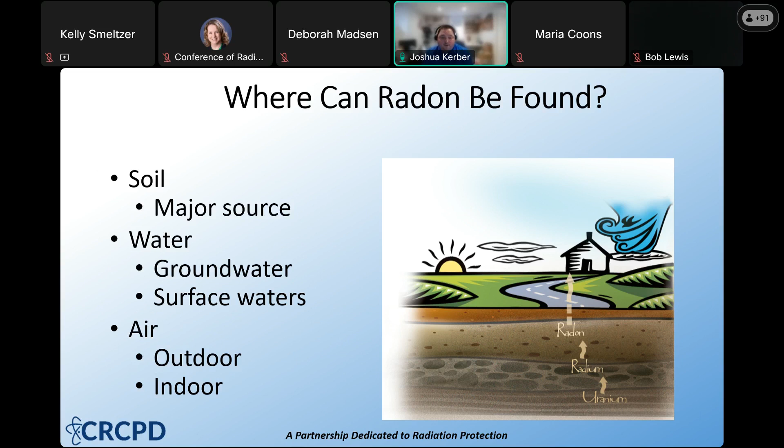Soil is the major source, though we will find radon in water in different amounts in different parts of the country, but our focus today is radon in the indoor environment, indoor air specifically. So of all those sources that are listed there, the indoor air is the problem.

There's no level of radon that's considered safe. We want to get it as low as we reasonably can. About 10 years ago, the World Health Organization put out a publication called the Handbook on Indoor Radon, a public health perspective. I urge anyone who has questions about the health effects and the health and medical based research to take a look at this - it's a really good document that summarizes and captures all of the research that we have up to that date. What they suggest is an international health-based standard, so to speak, of 2.7 picocuries per liter, which is a conversion from becquerels per cubic meter that they use in Europe. In the United States, we measure radon in picocuries per liter. Their suggestion is that we get radon below 2.7 in any of our living environments as well as work environments. In the United States, the US EPA many years ago set our action level at 4. That was a technology-based level at the time in the late 80s. They also recommend reducing your radon in your structures to less than 2 to be safe.

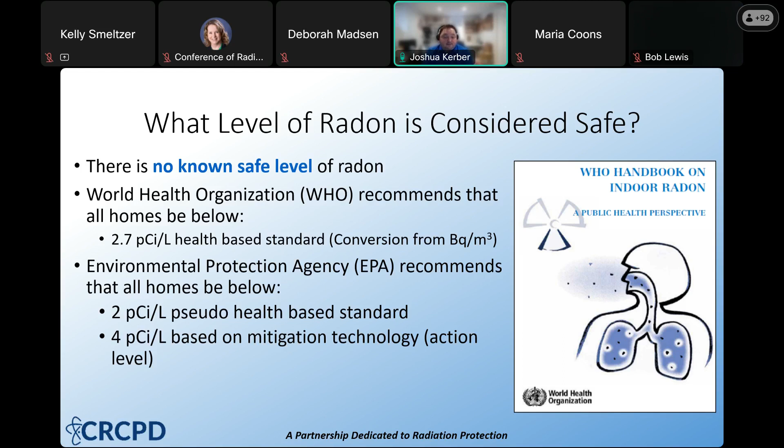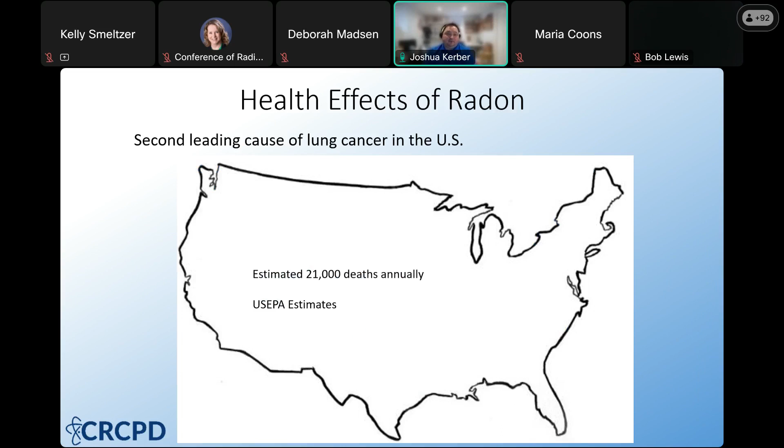As I said, radon is the second leading cause of lung cancer, and the US EPA estimates that 21,000 premature lung cancer deaths happen each year in our country.

This is a table of the risk for people who are exposed to radon. Many people say, well, this won't happen to me. Well, at a level of 4 picocuries in a never smoker, you have a 7 out of 1,000 chance of getting lung cancer. If this was a man-made chemical, it would be highly, highly regulated, but it's not. It's from Mother Nature, and there's a lot of apathy because we can't taste it, smell it, or see it. But it is very, very deadly. And if you look at the far right-hand table, the risk of lung cancer for people who smoke versus people who never smoke is almost 10x as much. It's a synergistic effect, so lung cancer is a very big concern for not only those who smoke, but those who never smoked.

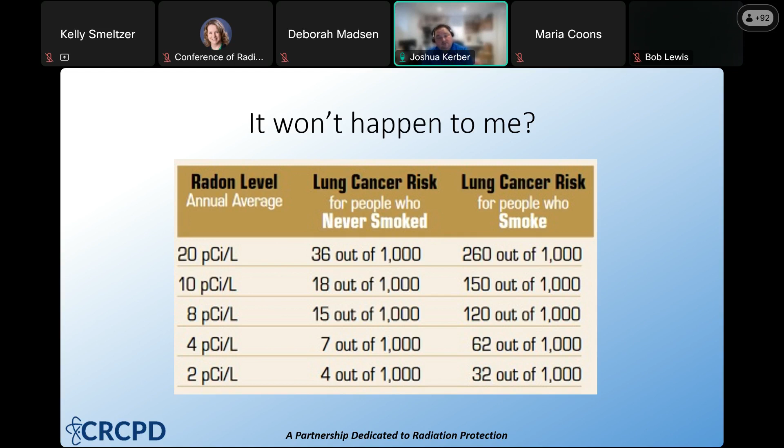In order to have a radon problem in any building, you need three things: a source, which is in the soil; a pathway that leads from that source to the house; and then a driving force. The pathways in most buildings, whether we're talking about a house or bigger buildings, are the same as far as radon entry points.

Where the concrete floor meets the wall, there's usually a crack. You have plumbing penetrations that may not be tightly sealed. We have earth and crawl spaces that may not be sealed, also sump baskets that do not have a lid, and then settling cracks that happen over time, but there are many more that aren't listed here.

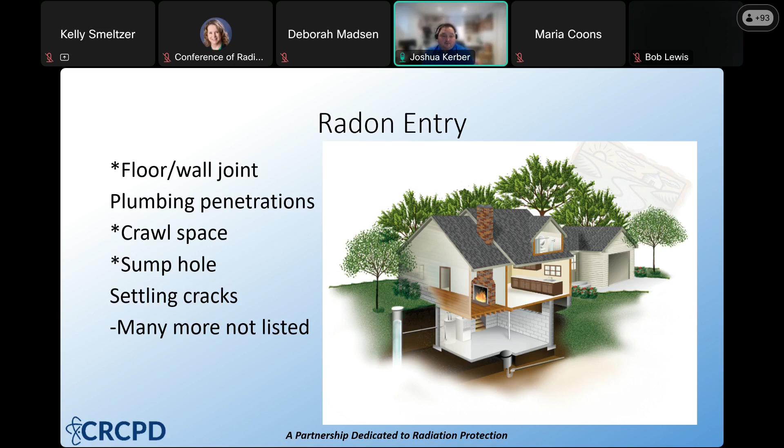A common misnomer is that if I have a basement, I'm going to have more radon. That's actually not true—the foundation type doesn't matter. So if you have a basement, slab on grade, a crawl space, or any combination of the three, you can still have a radon problem.

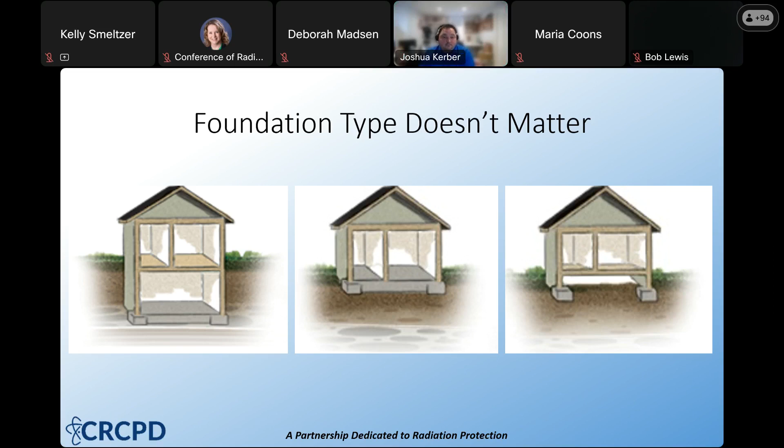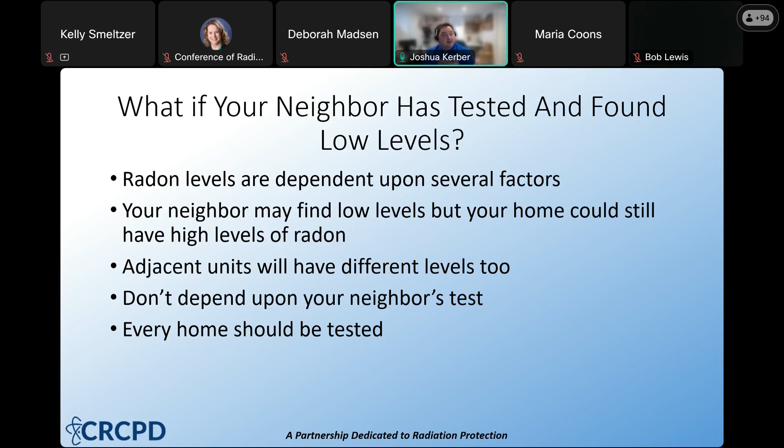So your neighbors have tested, or the unit next door to you has tested low—what does that mean for you? Nothing, really doesn't mean anything. Your radon levels are dependent upon several factors, including how you operate your home or your unit. So adjacent units will have different radon levels too. You're usually not going to see holistically the same level of radon in every unit on every floor of a building. So don't depend on your neighbor's test to decide whether or not you should test your home. Every home should be tested.

We also know that radon is a pressure-driven soil gas. More than 90% of the radon we find in buildings is brought into the building through pressure differences in the air. In most cases, that means soil gas, radon included, is being sucked in.

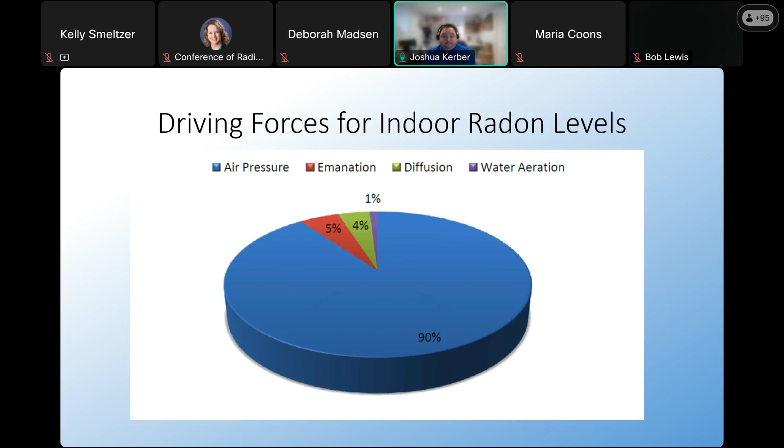Three things will cause air pressure changes in a house, and we'll discuss all three of these: the stack effect, the downwind draft effect or weather-related causes, and then the vacuum effect, which is how we operate homes.

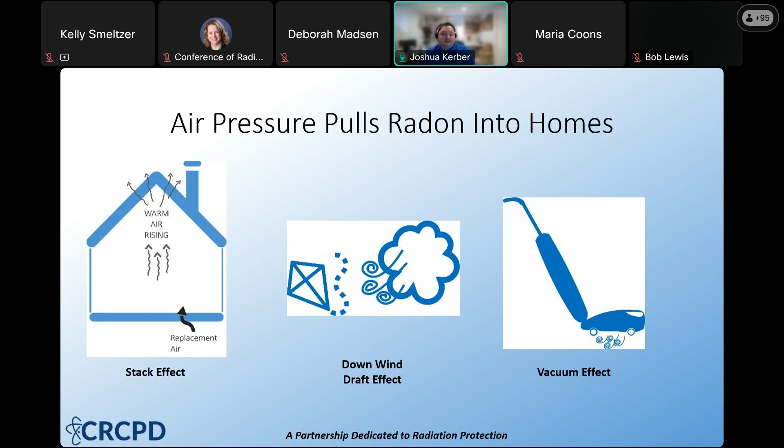This is a picture of some masonry going up in a colder climate. It's only about 20 feet tall, but as you see, the plastic canopy there is protecting the masons from doing their work and giving them a little bit of heat in the colder weather. So inside that plastic shell, the air is being heated so workers can work. If you notice what's happening, the bottom half or so of that plastic shell, the air is going in, and on the top half, the air is coming out—you see it kind of pillowing out. I challenge you to check out any sort of construction enclosure like this next time, and you'll see it happening. And it doesn't happen just in the winter, it happens all year round.

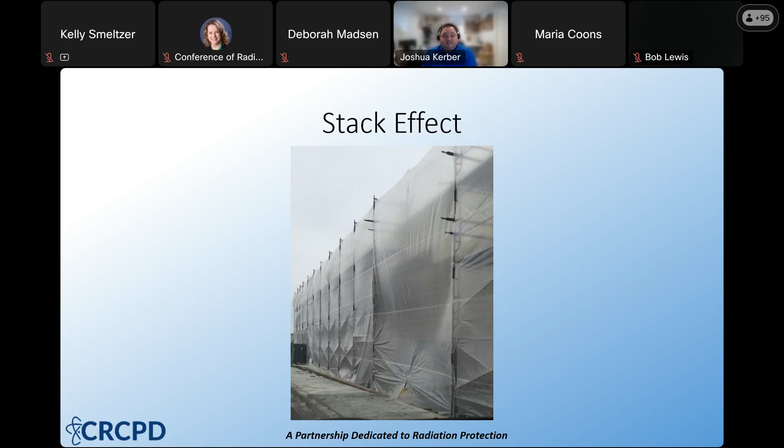So the chimney that we live in, we build a box, set it on the dirt, and start to live, breathe, and sleep in the thing. It's a house or a building. It acts like a chimney, and the house has the ability to suck on the soil. Every house you have sucks, believe it or not. Any unit of air going out the top of the building needs to be made up in the bottom part of the building. In many cases we control where that air is coming from, but not all. So when the lower level of the building is sucking air in from outside as well as from the soil, the radon is in the soil. That's where the radon is coming in.

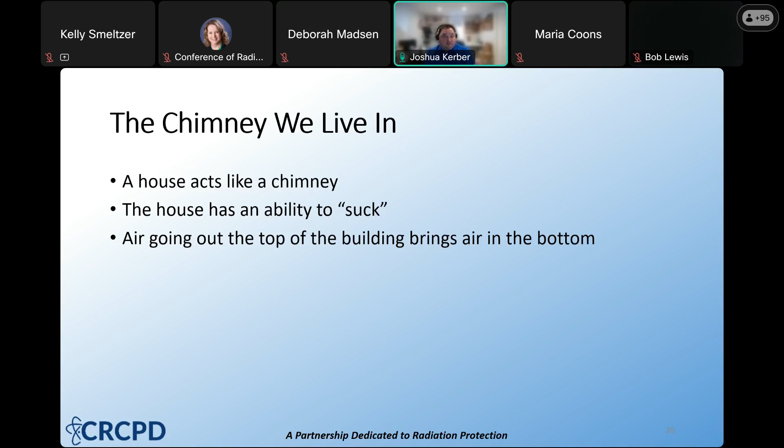To put it another way, we can take a look at the stack effect and the neutral pressure plane of a building. In this case, it's a two-story house. The bottom half of the building is drawing air in because the top half is blowing air out. Warm air rises and finds the high holes in the building and leaves. That creates the need for makeup air low in the building. The taller the building, the stronger the stack effect will be. And if you have holes in the building shell high up, that drives an even bigger stack effect.

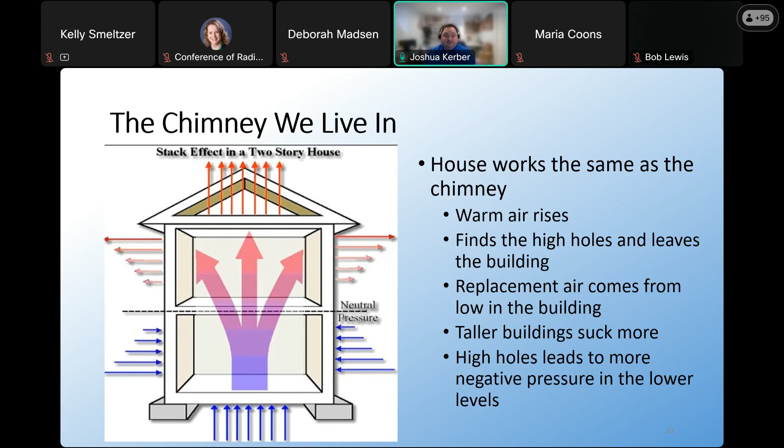All right, weather-related causes. Air is going to flow from areas of high pressure to low pressure.

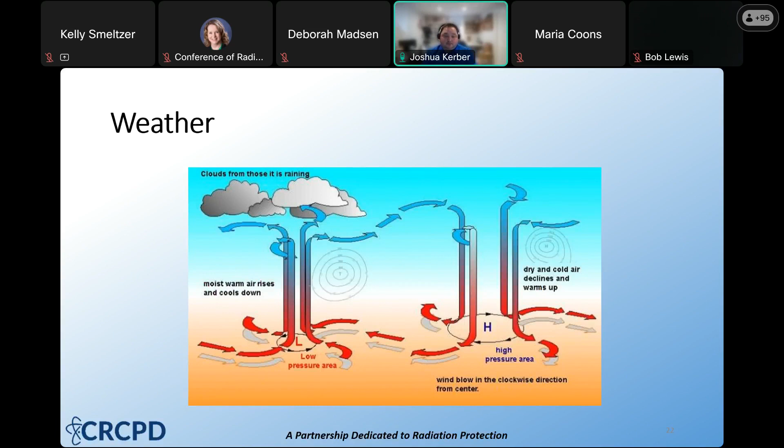So when high atmospheric pressure comes into your area, the atmosphere above you is pushing air down to the ground and into the ground, and it's pushing that air through the building as well. Our buildings are not airtight, even though we like to think they are. So rising barometric pressure will actually potentially lower radon levels in some buildings, but it's temporary.

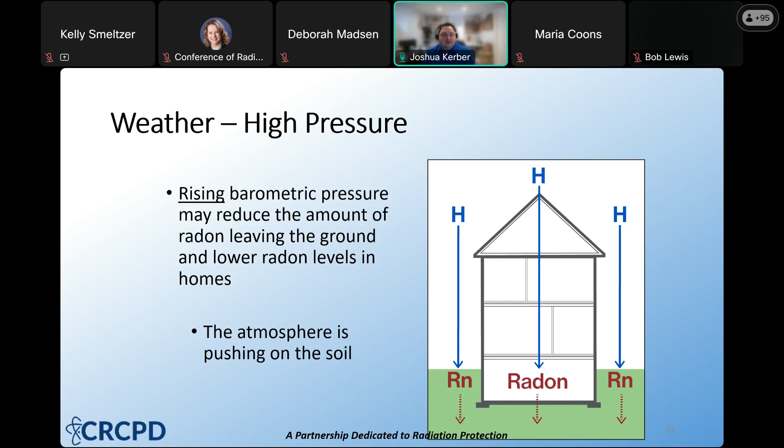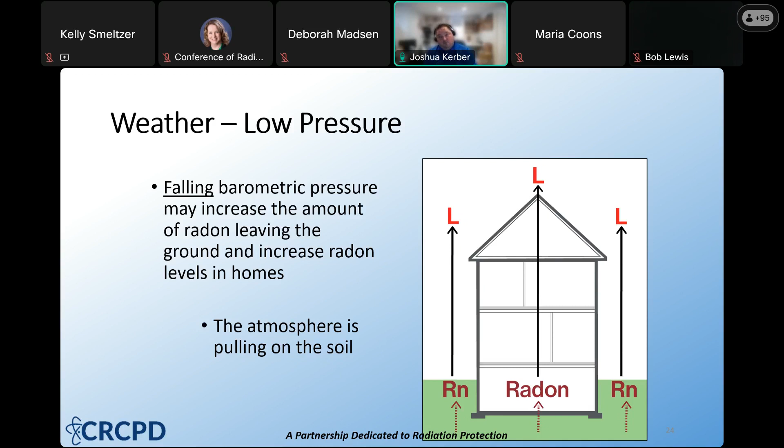On the flip side, when low pressure comes through an area, the atmosphere is actually drawing air up from out of the soil into the natural environment outdoors, but also into your house. So the stronger the atmospheric pressure is dropping, the more radon will actually enter in that short amount of time.

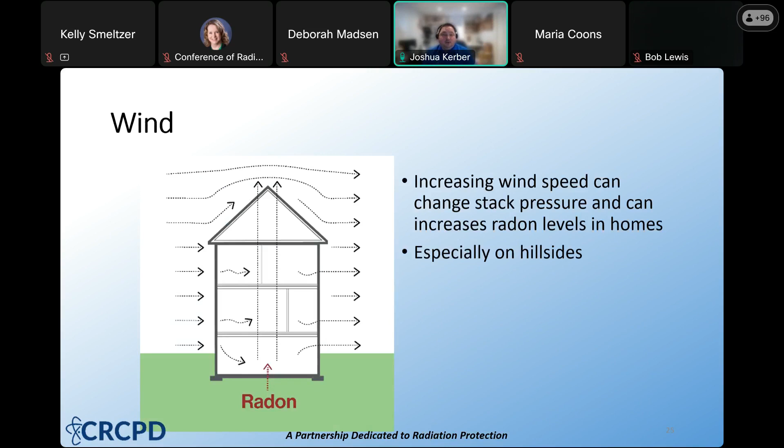Wind blowing against the side of a building or over the top of it changes the pressure dynamics inside the structure, and it's especially apparent on hillsides. So on stronger wind days, depending on which direction the wind is blowing from, we might see different radon levels in buildings.

There's also something we call hydraulic pressure, or when it rains or when snow melts, you get a layer of water on the ground outside. As that layer of water sinks through the soil levels, it caps the dirt outside. So the radon that was going to normally escape to the outdoors is now being pushed down into the soil. And if the path of least resistance is now a crack or gap into a building, that water will actually push that soil gas into the building.

The same thing can be said too if we add pavement, concrete slabs, or sidewalks to adjacent parts of buildings. The radon that used to naturally come out of the ground is now capped and can't escape, so it might start to escape inside the structure.

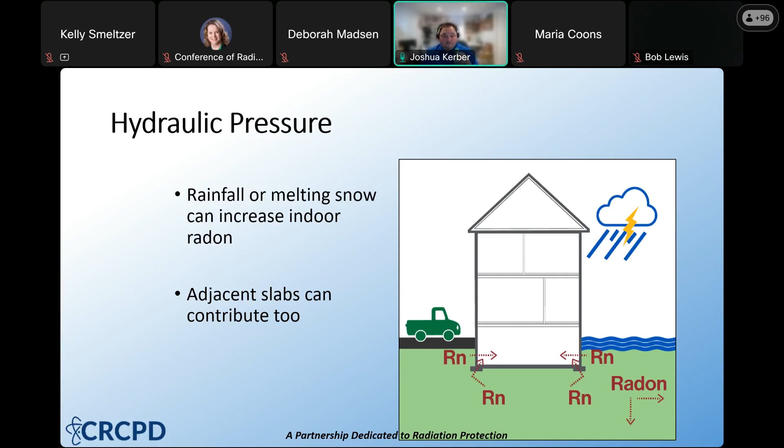Finally, things about building occupancy and what occupants are doing. There are things in buildings we have to make them habitable. Mechanical exhaust ventilation is one of them. We have many appliances that we have to run and exhaust an unknown or known amount of air from the building to the outdoors. Bath fans, when we're bathing - we call them fart fans, so I'll just say it. We need bath fans, and the average bath fan in a typical residential structure runs about 50 CFM. Well, where's the makeup air for that 50 CFM getting exhausted outside? Maybe it's controlled for, but it likely isn't completely controlled for, so now the house is calling for more air.

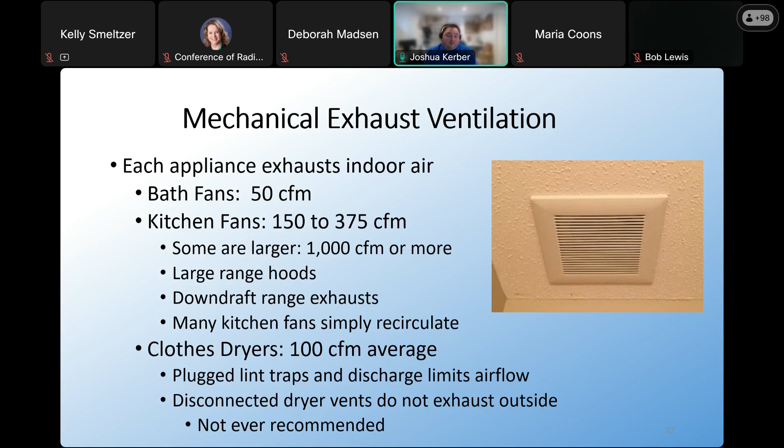The same thing is said for kitchen fans that exhaust outdoors. You have strong air movers in kitchens because we want to capture the heat and humidity coming off the cooktops. There are other exhaust ventilation appliances too, for instance your clothes dryer - if it's properly vented, it's taking indoor air to dry the clothes and expelling that outside. Certain other combustion appliances can also use indoor air for combustion. This is not a holistic list, just wanted to make you aware that common appliances take indoor air and exhaust it outside, and we need to ask where that makeup air is coming from - lower levels of the building, off from the soil.

All right, now we're going to get into radon testing. Just so everyone is aware, there are two types of radon test devices out there. There's short-term tests that go somewhere between usually 2 and 7 days, and then long-term tests, which go for 3 to 12 months. In real estate transactions, we don't use long-term tests, so for the purposes of the rest of this discussion, we're going to talk about just short-term measurements.

This is an example of one short-term test kit. It's a pouch that has charcoal in it. When you're doing a short-term test, regardless of what exact type of short-term test device you're going to use, you need to keep exterior windows and doors closed for the duration of the test. Then after the test duration is complete, you take the kit down, seal it up, send it to the lab, and the lab will send you the results.

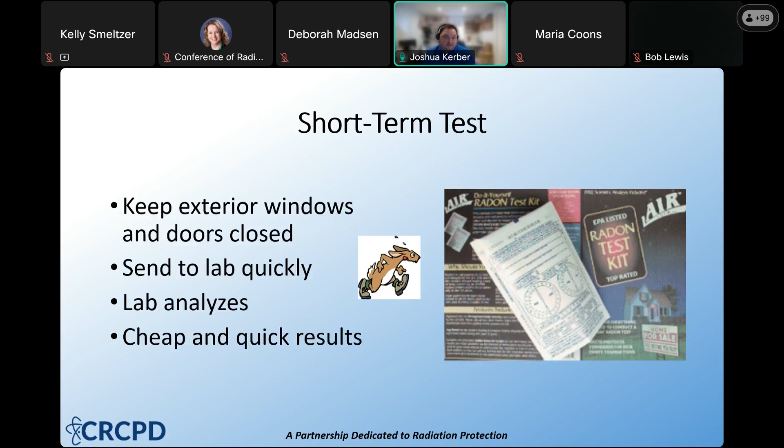This is a very detailed document, and I wanted to go over some of the sections with you just to make you aware that this isn't just something that's willy-nilly put out. A lot of hard work and dedicated professionals have put this together. Section 3 talks about test locations, and there's the ground contact locations, which in these two illustrations are in red, and then the upper floors, which are in blue. Section 3.2 is what might be considered a common multifamily building, a 4-floor or 5-floor multifamily building, where we're testing every ground contact unit, those above a garage because it would be the next unit up. And then in the lobby, you'll see there's 2 test devices because it's a larger footprint room.

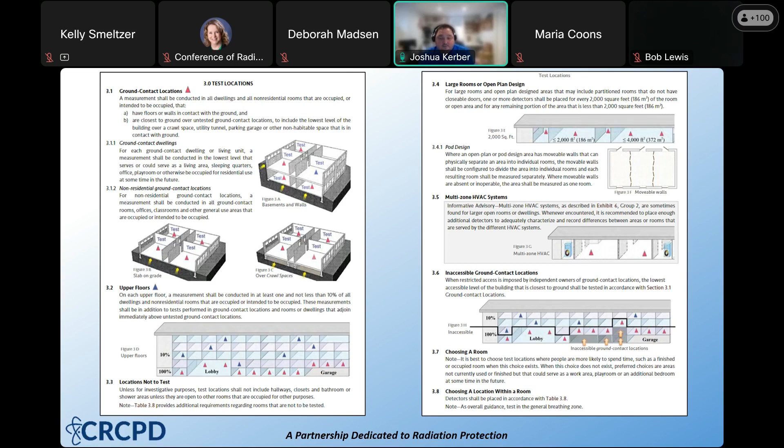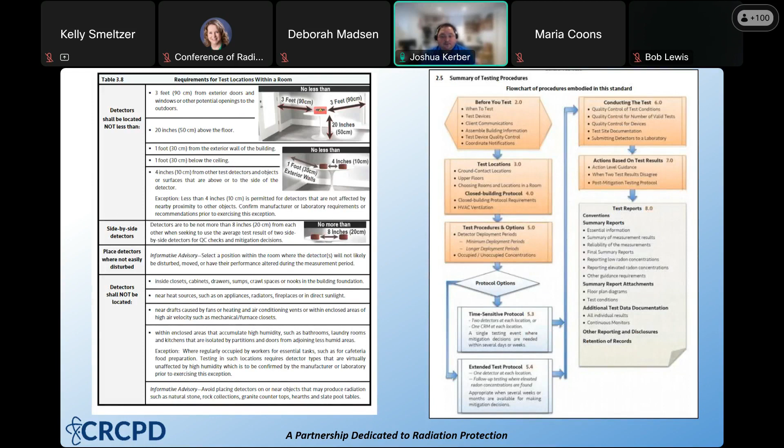So where in the room or where in the unit is a test device likely to be placed? Well, we want it to be in the breathing zone of the room. We want it to be representative of the air that's going to be breathed by humans, so we need to have it about 20 inches off the floor at a minimum. We want to keep it away from doors and windows, at least by 3 feet. Keep it 1 foot away from exterior walls, away from heats, drafts, humid areas.

So we're not going to test a bathroom, laundry room, or kitchen. You want to test ideally a bedroom or say a family room, the room where someone spends most of their time, and then 4 inches away from any other object. If you're going to suspend it or hang these test kits from the ceiling, you want to be at least a foot below the ceiling. I'd like to say 6 to 8 feet above the floor.

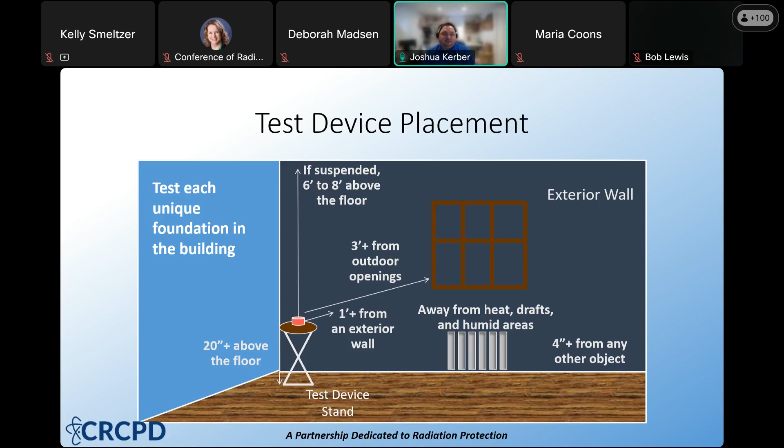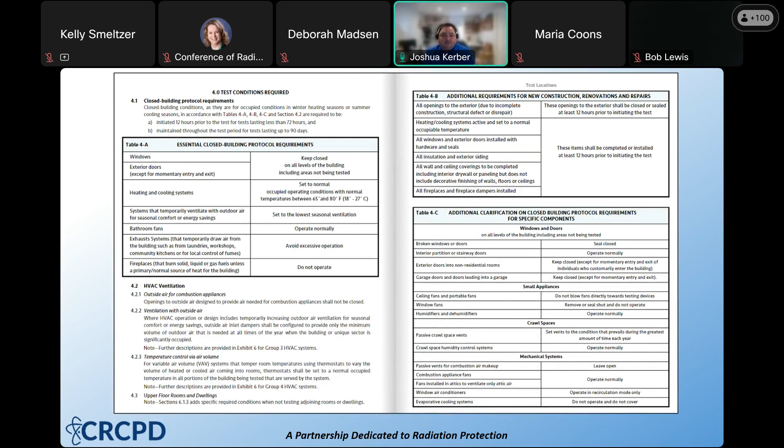Continuing on with the standard, section 4 talks about the test conditions that are required and the HVAC ventilation and how things should be set.

Section 5 talks about the deployment periods. We're talking short-term test devices, so we're talking usually 2 or 3 days, maybe 4 days in real estate transactions, but it's not the only duration that you're allowed to do. Section 5 goes through that.

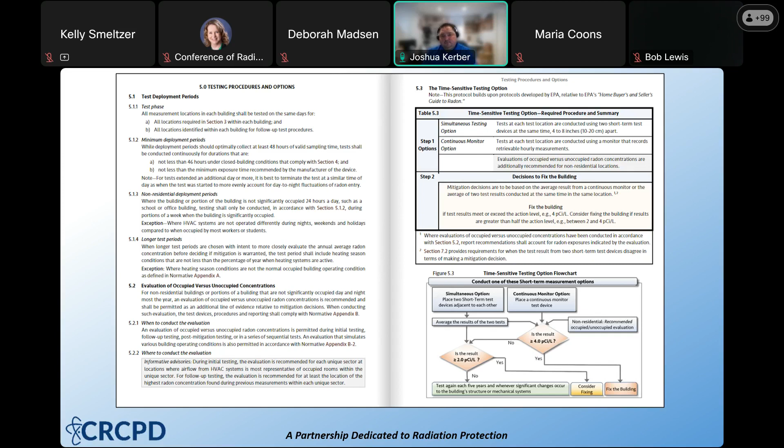Section 6 talks about the things that happen during the test, maintaining closed building conditions and doing visual inspections of the property as well.

Section 8 talks about test reports and what you all should be seeing in the radon test reports that are coming from radon professionals, as far as summary reports and the essential information, and then the summary results and next steps.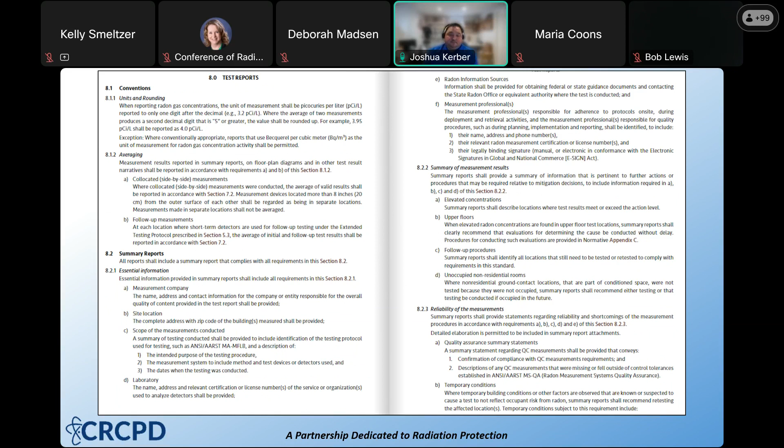The section continues. If there's low radon concentrations, there's one type of radon test report. And if you go to the next slide, it'll show what we wanted to hear or see about the reporting value of elevated radon concentrations. I just want to show that there's a lot here in this section of 8 that is required to be on these professional radon test reports, including some of the attachments as well.

And again, this is the last part of section 8, which talks about what happens with the continuous monitors if you go there, and other reporting and disclosure requirements.

Next we're going to move on to talk about mitigation. There's also additional information available in the companion guidance at the end of this document. It has sample forms and descriptions, including building diagrams, and guidance for building managers.

Let's talk about mitigation then. You did the testing, you found out there's a problem. How do we fix it?

This is a very simple schematic from the US EPA about having a multi-suction point system in a 2-story house. The mitigation process and principles are the same regardless of the size of the building.

We want to suck the gas out, but you want to stop it from getting into the building in the first place - that's the most successful form of mitigation. So we want to redirect the source. We do that by a series of pipes attached to a radon fan that runs continuously, drawing negative pressure from around and below the floor and blowing it outside.

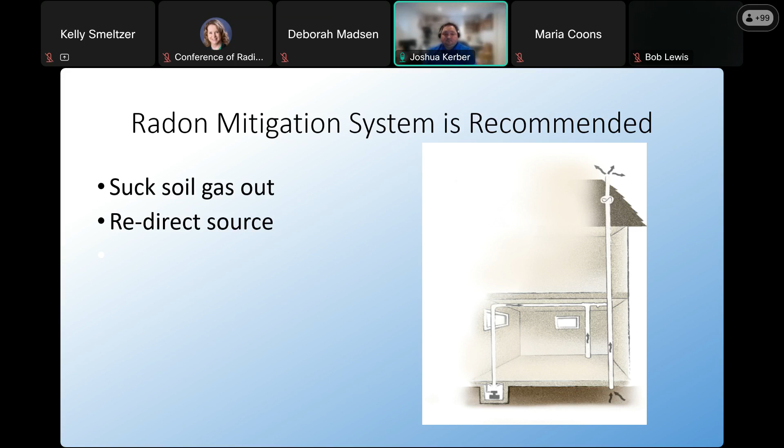I do want to stress that mitigation is a professional level activity, especially in large buildings. There's additional training requirements and know-how on how to do this right, with detailed system design specifications that these trained professionals need to know.

They need to know how to do diagnostics and investigations - how much airflow is it going to take, how much pressure do we need to deliver in order to get adequate suction underneath the entire floor.

In single family homes, a lot of companies will just install a cookie cutter radon system, and that will work a lot of the time. That will not work in big buildings - you really need a lot of applied building science.

And active soil depressurization, or ASD, as it's more commonly called, is the most common solution for reducing radon in buildings.

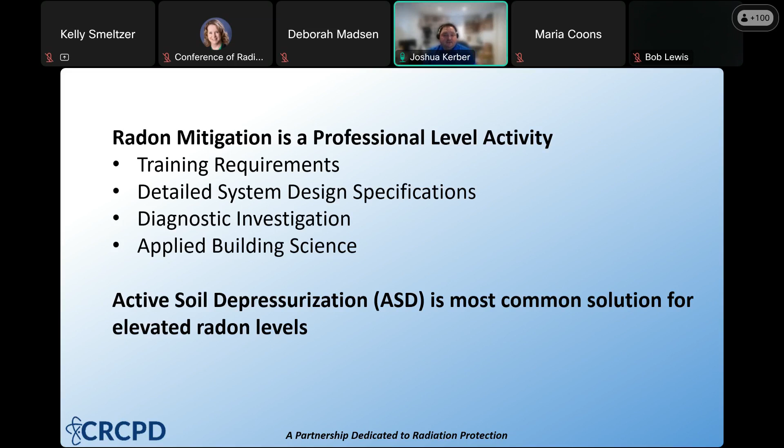And we have a standard for this as well. In this case, the mitigation standard starts with standards for existing homes, and it covers most everything that you'll need for the standards and how to do things.

However, when you bring in multifamily and school and commercial buildings, the larger buildings, it's an add-on standard to the soil gas mitigation. So you're going to need both of these standards to look at, because the one for large buildings refers back to the one for single family homes.

So a common question is, why can't we just seal the cracks? Well, sealing is not a standalone technique. We can try as much as we want to seal all the cracks, but there's 2 types of concrete out there - there's concrete that has cracked, and there's concrete that will crack.

So there's the cracks that will form. There's too many to find sometimes, and they're not always accessible. That's why sealing is not a standalone technique.

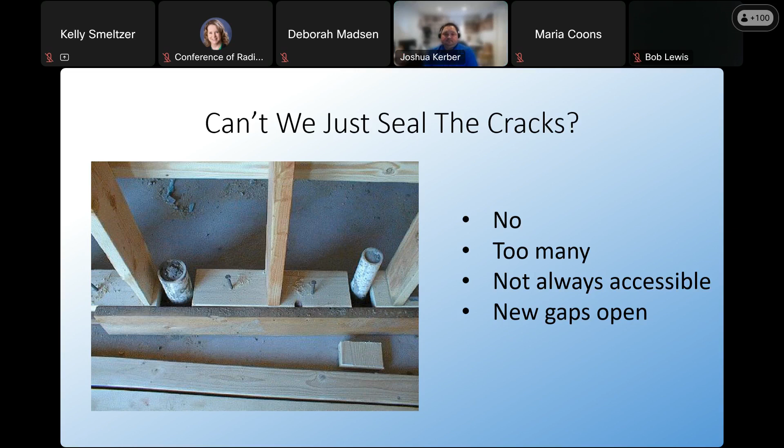So it starts with a hole in the floor. We drill a hole through the floor - sometimes we core a hole, sometimes we chop one out. But then once we're under the floor itself, we'll dig out 5, 10, 15, 20 gallons of fill to create a suction pit. Later, this pit will be sealed from the top and made airtight.

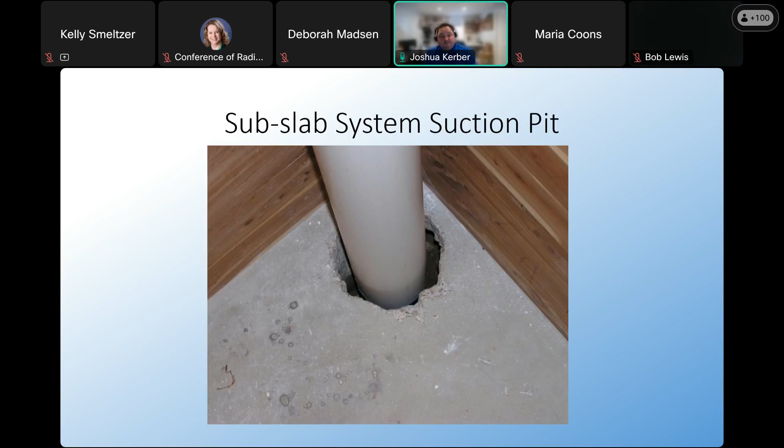We can also use sump baskets to draw air from underneath the soil. Oftentimes these are connected to drain tile, which is shown in the next slide.

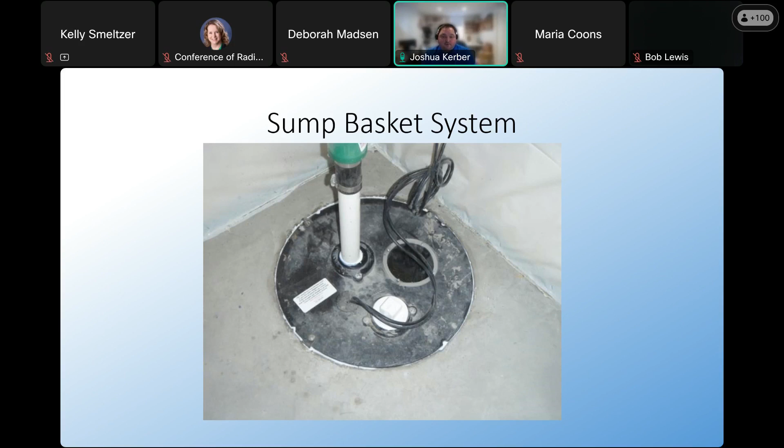These perforated lines run around the foundation of many buildings and dump back then into one place, which is the sump basket. And they're normally not chock full of water.

So if they're not full of water, they're full of soil gas. And if we can capture that soil gas while it's collected there, we're very successful at mitigating the structure.

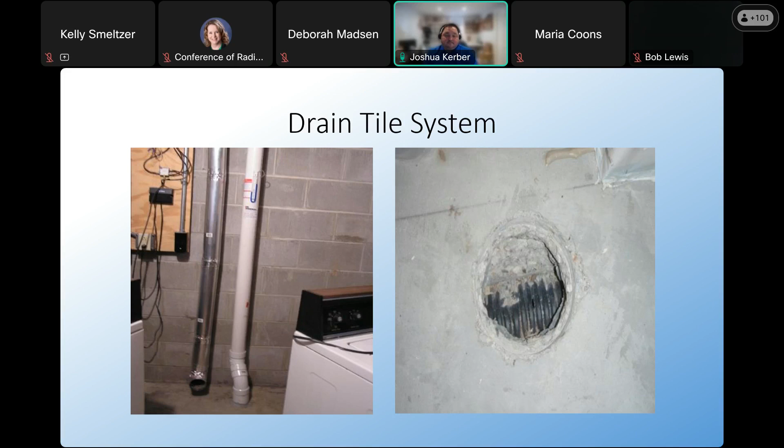Crawl spaces do need to be sealed. Sometimes we also add a suction point under the crawl space membrane to capture the soil gas that's underneath there.

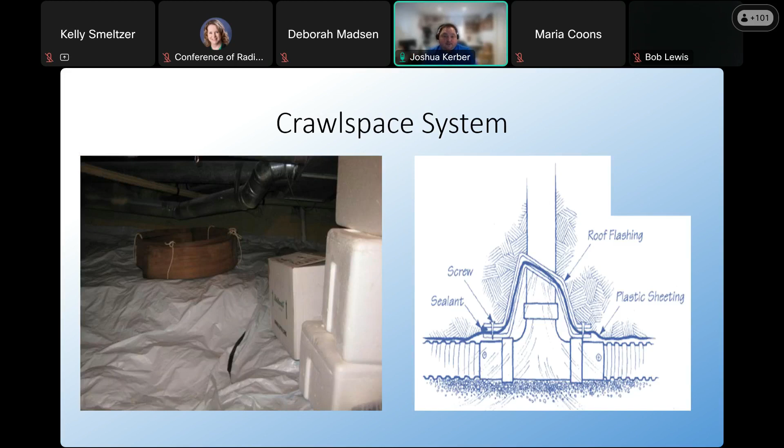Sealing is very important. It's not important to seal to try to keep radon out. We want to seal the gaps and cracks that we have so we can keep the conditioned air in the building.

When you have lots of gaps and cracks and openings that are unsealed, it can short circuit the radon system, costing you lots of money to operate this thing long term. When we seal these gaps and cracks, it makes the radon system more efficient and far more effective.

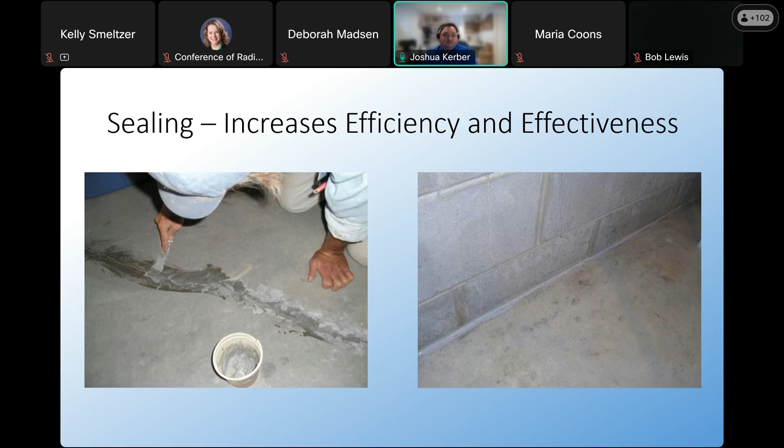In the United States, we put our radon fans outside conditioned spaces. The fan housings can leak. It's rare, but it can happen. And the amount of radon in the soil gas is a lot higher, hundreds of times higher than what makes it into the building. And we're not continuously testing for radon.

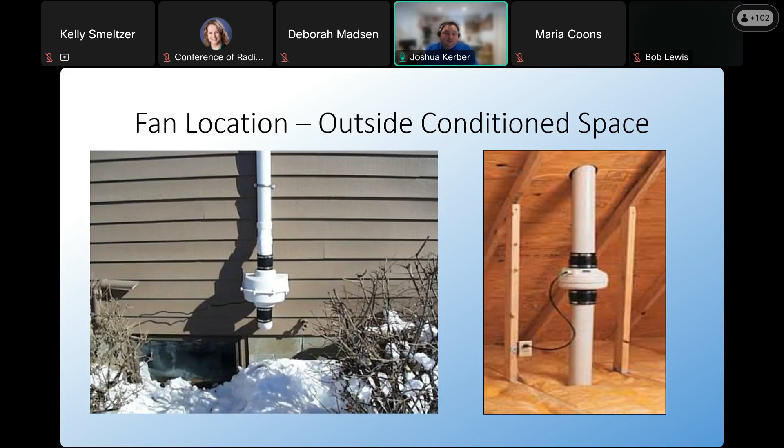So that's why we want to keep the fan outside. And then the next slide is a cross section. I'm getting ahead of myself. Then we exhaust it up through the roof. Once we get back to the standards, we'll discuss the other stuff. So it looks like a normal plumbing vent stack once it's above the roof line.

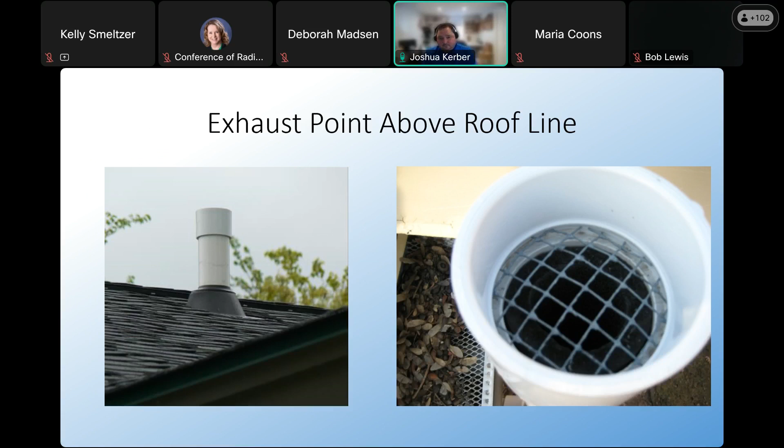Here's the cross section I was referring to. The pipe route can be either in the interior, shown on the left, or the exterior, shown on the right. But what's important here is that any pipe in the conditioned space of the house needs to be below the fan. What that does is put it under negative pressure, so the air is going into the pipe and not blowing out of it. So if there's a loose fitting or the pipe gets punctured somehow, you're not dumping humidity and high concentrations of radon into the structure. You're actually drawing it out.

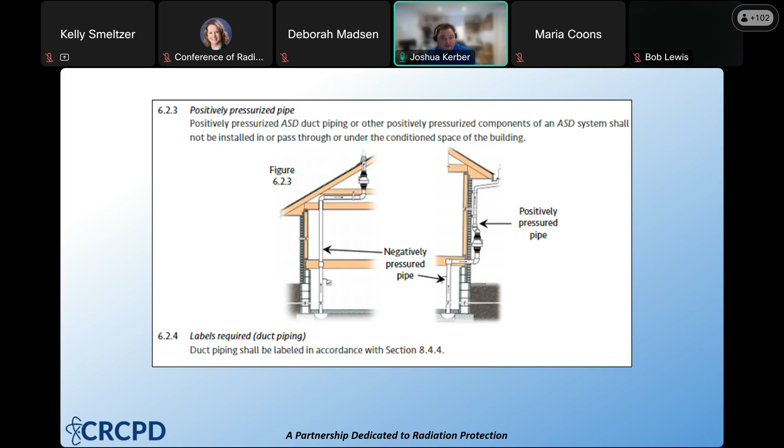There are exhaust requirements, and sometimes these can get pretty complex depending on the situation. Here's just a handful of examples. The exhaust point needs to be 10 feet above grade. It needs to be 4 feet above windows, or 10 feet away from windows if it's not more than 4 feet above it. If you're going to put a horizontal discharge on this, like a 90-degree elbow, then you need to be 20 feet above grade.

We want to be venting these things straight up, as shown in 6.4.9. We don't want any elbows on the end of these. But if you need to get around an obstruction, that's allowed. We just do not want to allow it to blow back down onto the building anywhere.

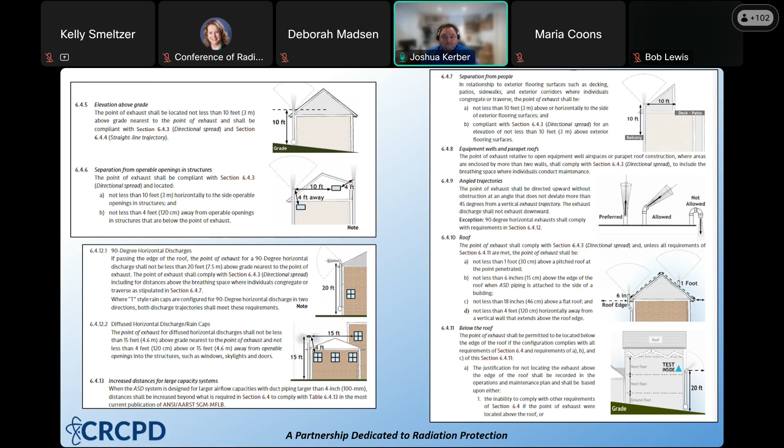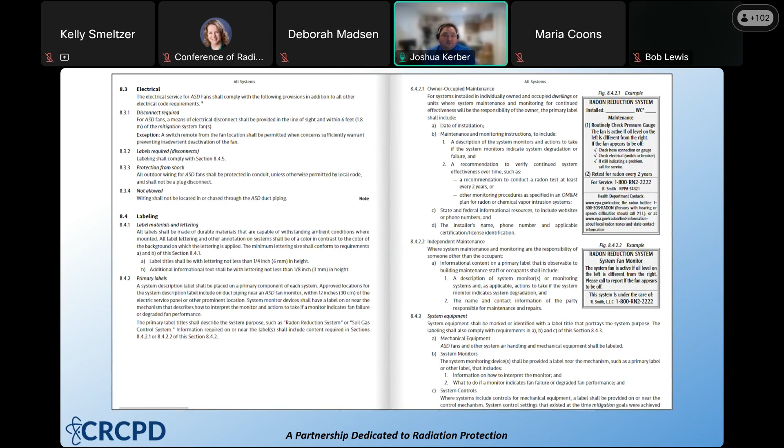There are electrical requirements that come with these systems. The systems need to be labeled, and here are some examples on the right-hand side of the information required to be posted on the system itself.

The post-mitigation requirements include a post-mitigation test that needs to be conducted, and Section 9 of the Soil Gas Mitigation Standards discusses what those requirements are.

And maybe the most important piece for post-mitigation is Section 10, the OM&M, or long-term operations, maintenance and monitoring plan, which is required to be not only created for the system but also handed over once the system is complete.

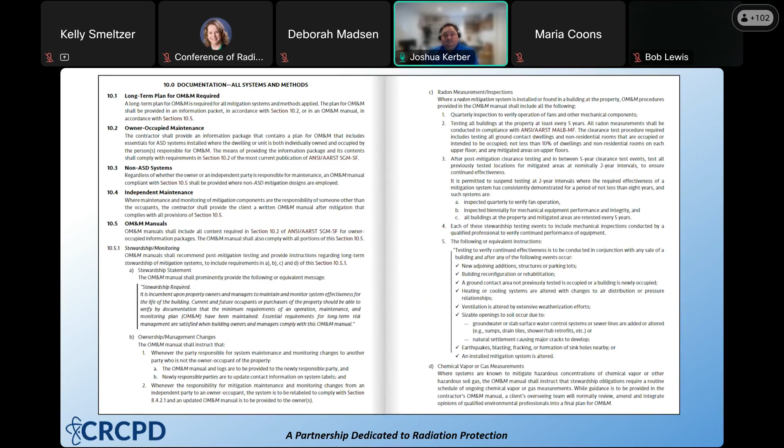There's additional information in these two documents as well, with additional exhibits and companion guidance, example forms, guidance for property owners, and example logs and checklists, found in the companion guidance at the end of the soil gas mitigation standards.

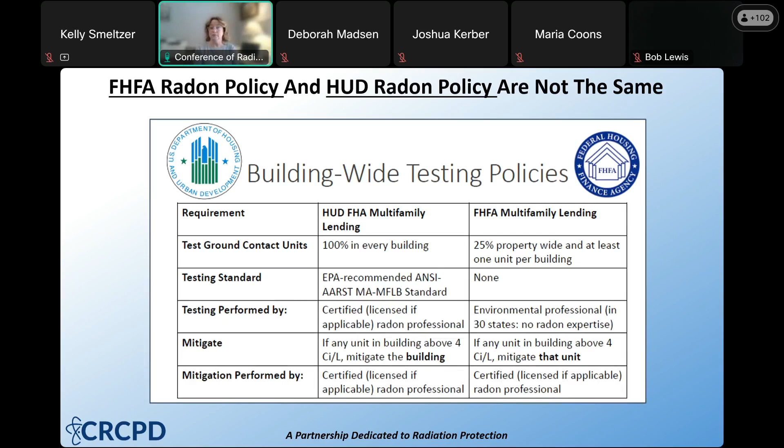There is another important point for consideration I want to provide. A state may not have a specific radon requirement or laws enacted, but a certified radon professional who is certified by a national proficiency program agrees as part of becoming certified to follow the ANSI-AARST consensus-based radon standards. This may lead to a potential conflict of interest for radon professionals if they are asked to not follow the ANSI-AARST multifamily measurement standards—for example, not testing 100% of the ground contact units during a multifamily building radon measurement process. Though the FHFA radon policy stipulates at least 25% of the ground floor units, the radon professional is bound by his or her certification to follow the standards, which require 100% of the ground floor units. This is an important point about which all lenders and environmental professionals should be aware and understand, to try to avoid placing the radon professional in a conflicted position which threatens his or her certification.

In a state which does not have radon measurement or mitigation requirements or laws, we anticipate that the lender will follow the FHFA radon policy. Please do remember that potential conflict of interest with our radon professionals that I just mentioned. Even in non-regulated states, it is recommended that the ANSI-AARST standards for multifamily measurement be followed, as those are the nationally accepted consensus-based standards.